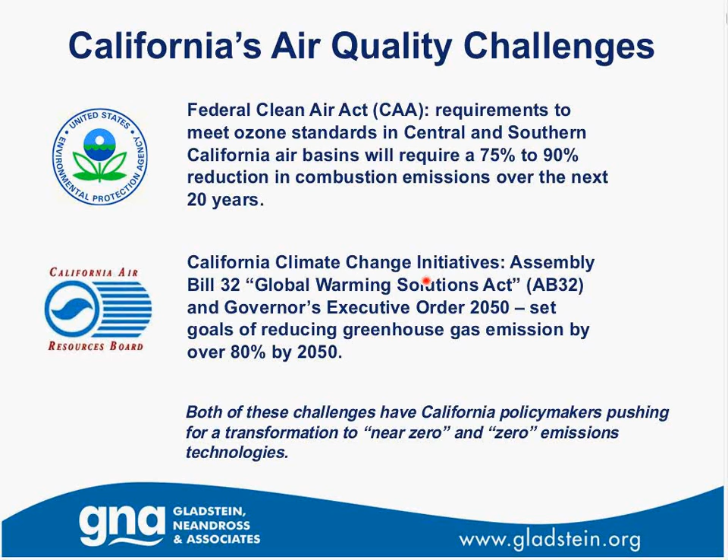Improving air quality and reducing climate-altering emissions are parallel policies being pursued by the state of California. One would think that the pursuit of one objective would help in the pursuit of the other, and that air quality regulators are trying to coordinate the two. This is in fact happening, the coordination is happening, but unfortunately, current air quality and climate protection plans miss crucial deadlines.

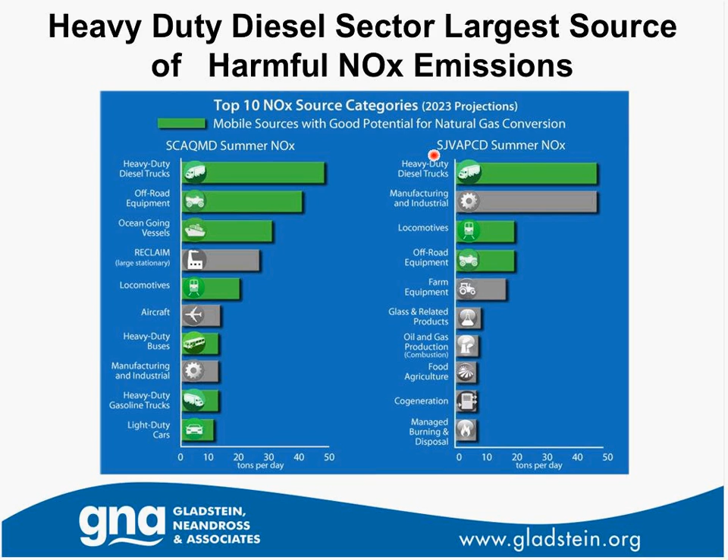Now the good news: these sources of emissions can be part of the solution. Many sources have high potential for emission reductions if they were converted to natural gas. What would converting heavy-duty engines to natural gas achieve in terms of additional emission reductions?

Everybody on this call is aware of the dramatic changes that have taken place in the energy sector over the last few years. The cost of natural gas has led to virtually every single manufacturer of heavy-duty engines to shift their focus from diesel to natural gas. Why is this the case? Because their customers are demanding natural gas alternatives to the dirty, more expensive diesel fuel that they're currently compelled to use. It's all about economics.

It's exciting for many, many reasons, but the one I'm going to focus on this afternoon, and which was the subject of a report that we recently produced, is that natural gas engines are on a developmental trajectory to be 90% cleaner than the current standard for heavy-duty engines by the end of this decade.

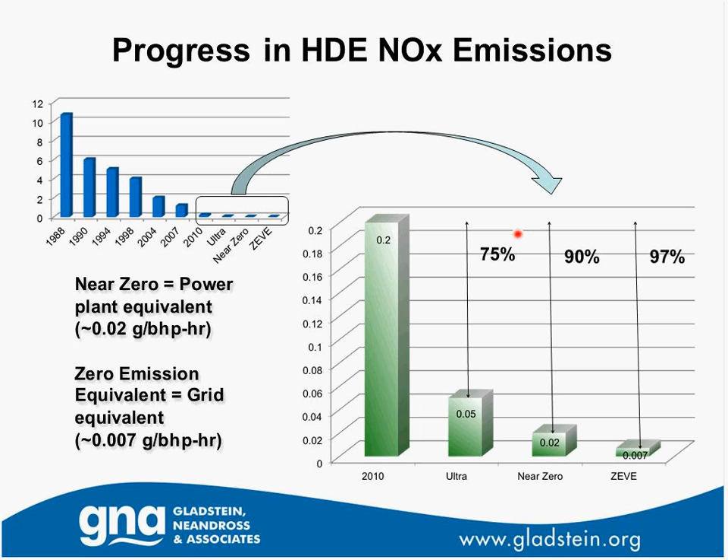This is possible. Research sponsored by Southern California Gas Company documents all of the technologies, many of which were off the shelf, that are now being applied to heavy-duty natural gas engines to enable them to meet these exciting new levels of ultra-low, near-zero emission technologies. Many of these technologies are represented on this slide. We all know that natural gas is inherently cleaner than diesel or gasoline as a transportation fuel.

To get as clean as natural gas, particularly in diesel engines, all kinds of emission control technologies have had to be developed over the last 20 years. But what happens when makers begin to apply these technologies to our inherently cleaner natural gas engines, as well as

begin to design engines from the engine block up to take advantage of the combustion characteristics of natural gas. The technologies being developed are essentially grouped into 5 major categories, or pathways, if you will, to achieve the emission reductions needed to meet these important health-based air quality standards. We group them in these 5 areas.

There's advanced engines, advanced after-treatment, increased hybridization of these engines, better vehicle integration primarily focused on efficiency improvement, and enhanced use of different gases like renewable gas, biogas, biomethane, and increasing the proportion of hydrogen in natural gas supply, which is something we've actually been talking about for about 20 years as a method to stimulate the hydrogen highway.

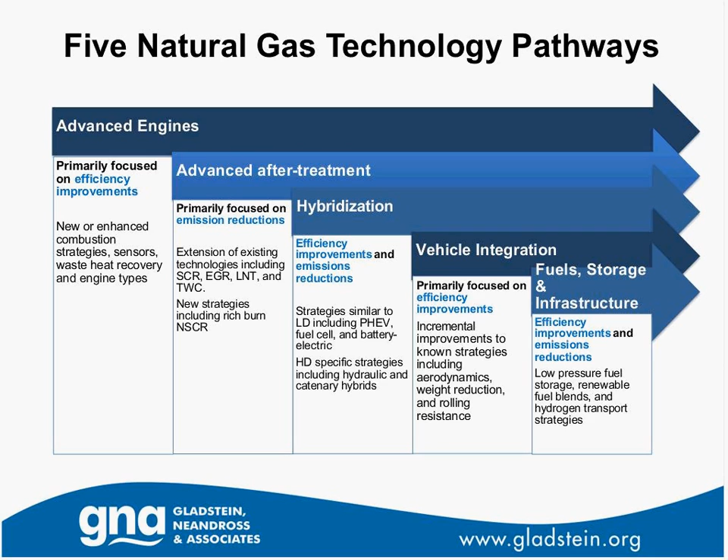All of the different technologies currently being worked on are going to yield these near-zero emission heavy-duty natural gas engines. Each will help achieve the dramatic reductions that are so desperately needed. Research has found that these technologies are already being applied to natural gas engines with dramatic results, some of which you're going to hear about in the presentations that follow.

What engine manufacturers have told us is that they now need to commercialize these new technologies. There has to be demand for these new technologies. California has been a leader in innovating air quality and climate protection policies, and it can continue to do so through the promulgation and implementation of policies to encourage the rapid development and proliferation of these near-zero emission heavy-duty natural gas technologies that we so desperately need.

Supportive public policy would dramatically help to accelerate the development and deployment timelines suggested here, which will be talked about by my colleagues a little bit later on.

Some policies include direct funding for research, development, and demonstration of what we like to call pathway technologies, to push emission reductions faster and further. The development of policies and incentives to encourage early demonstration projects. The promulgation, very important, of performance-based standards.

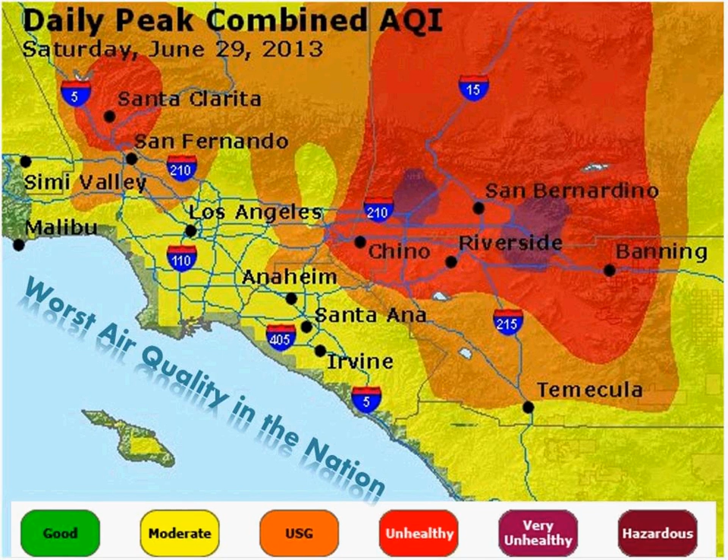In order to come into compliance with federal standards for healthful air quality, we've got to reduce those down to the dashed lines, 2023 and 2032. It turns out to be about a 70 to 90% reduction for all these different categories if we have any hope of meeting those federal standards and achieving clean air.

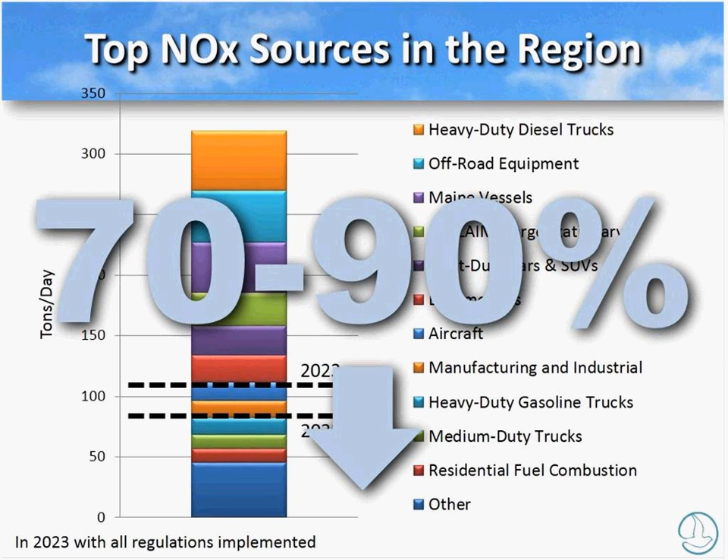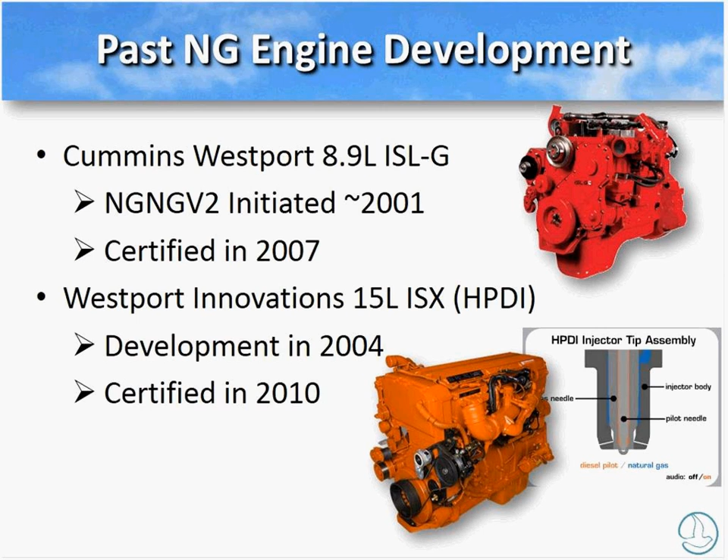The first one, the 8.9 liter, was certified in 2007, followed by the 15-liter Westport Innovation engine in 2010. Due to the commercialization of those technologies, we've had some pretty significant success stories in terms of converting fleets over to the cleaner technology.

LA Metro, the third largest transit district in the nation, converted all of their buses to natural gas back in 2011. We had a large population of school buses converted to natural gas, as well as haulers. 34% of the fleet here in the South Coast uses natural gas for these different hauler applications.

We're currently also supporting the development of engines of different sizes. We have support for the Cummins Westport 12-liter engine, which was certified at 0.15 grams per horsepower NOx, launched just last year. We're also supporting the Doosan engine that Mark will talk about, and Stephen will probably talk about the 12-liter engine.

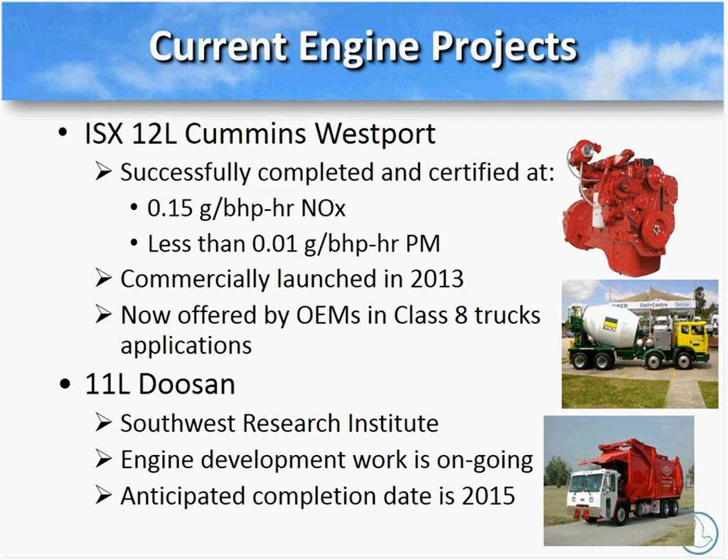The point is that we're looking at different vocations. We did the 8.9-liter and 15-liter engines, and now we're looking at the 11 and 12 liters. The reason we're looking at these different vocations is because as we examine different emissions profiles for duty cycles, we're seeing that different fuels and technologies actually have benefits depending on their use.

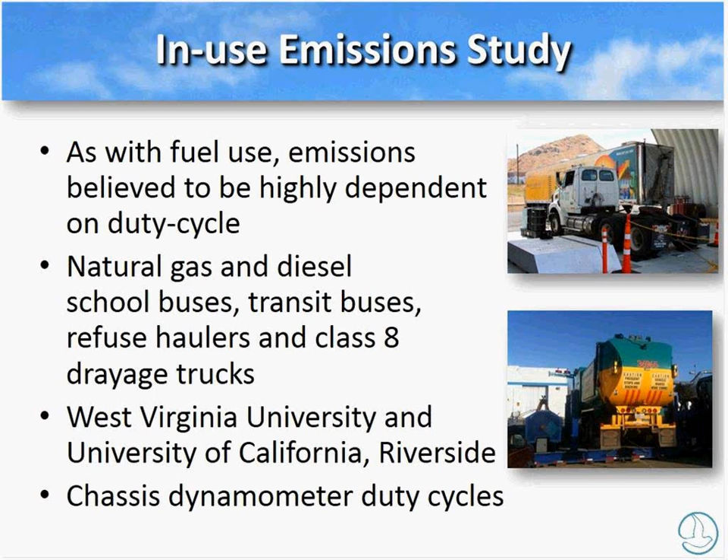For example, we did an emission study looking at different fuels—natural gas and diesel—in different applications: school buses, transit, haulers, and drayage cycles. I want to highlight a couple of those duty cycles and the results we had: a refuse application and a drayage application. The blue bar is NOx in grams per mile for natural gas technologies, and the red is diesel technologies in those same vocations. These are run on a chassis dynamometer with these specific duty cycles.

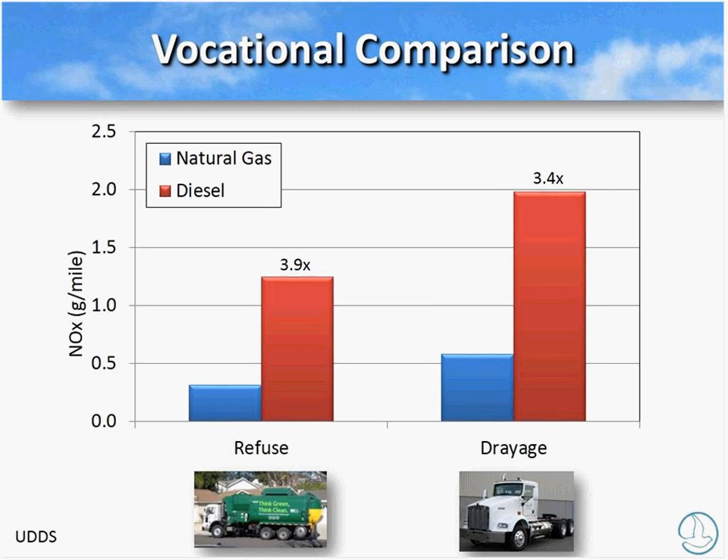We found that natural gas had about 3 to 4 times lower NOx emissions rate. For the drayage application, there are different duty ranges—near dock, local, and regional, which would be the longer haul. Again, we're seeing significant emissions reductions with the natural gas offering, due to the SCR not coming up to temperature on the near dock and local low cycles. So there's still potential for choosing the right technology for the right application, and in this case, natural gas seems to be a good fit for these different vocations.

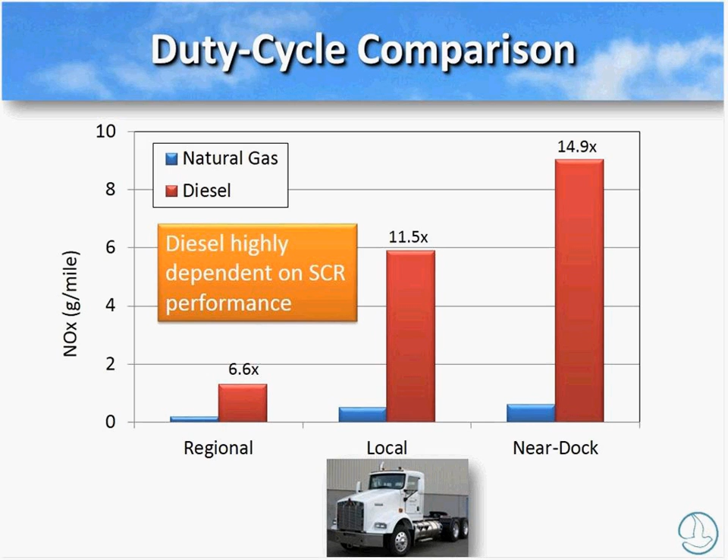As we look to the future, Cliff mentioned there's just a huge movement due to market drivers and the economics of natural gas, with fleets converting over because of the financial gain.

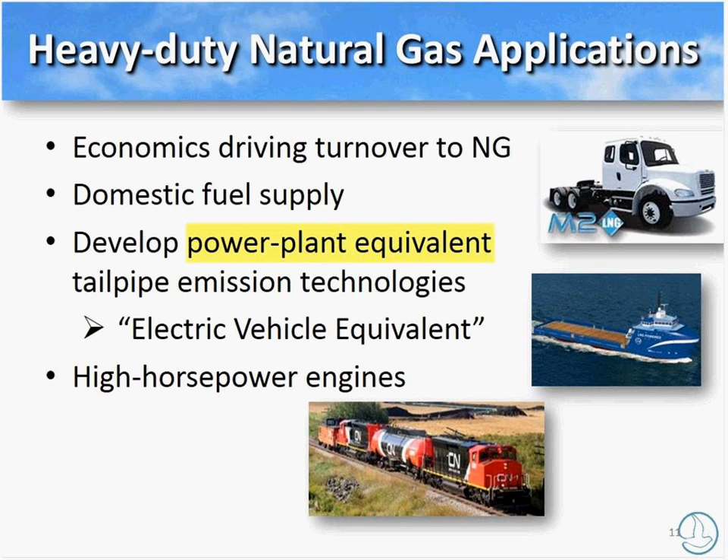So what we'd like to do is get a twofer, so you're getting emissions benefits as well as a market driver. But how do we get the emissions to be power plant equivalent, or as Cliff mentioned, equivalent to an electric vehicle? Based on relations that we've done, in order to get from a 0.2 gram standard, the 2010 standard, down to where we need to be near zero or power plant equivalent, you've got to reduce it by an order of magnitude.

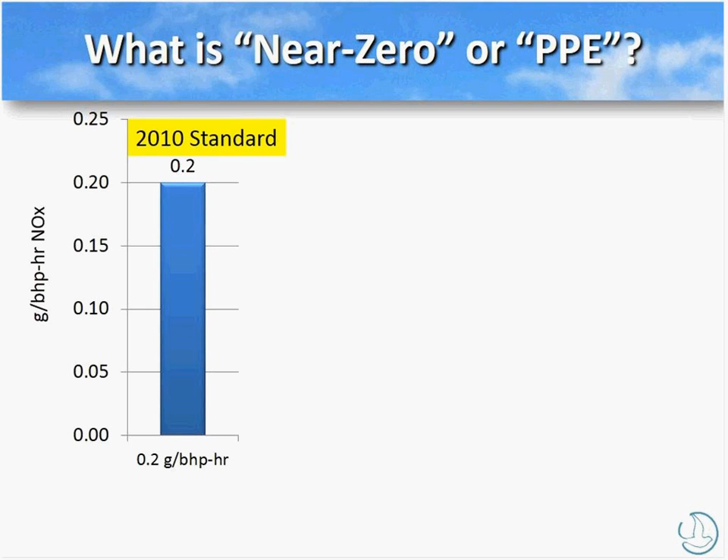I'm just throwing up some numbers here to show the mix of different emissions rates that we looked at. If you look at the EV combined cycle, this is an emissions rate for a very clean combined cycle natural gas power plant, it would give an equivalent tailpipe emissions of 0.03 grams per brake horsepower NOx. If you look at simple cycles such as a peaker unit, it gives about a 0.04 gram NOx emissions.

But if we look at our grid in the basin, so the energy consumption versus the NOx emissions for our region as a total, it's about 0.01. So that's what our grid would likely provide in terms of an electric vehicle equivalent. That's why we're saying this 0.02 is about the right order of magnitude to capture these different variations on how you would point to an equivalent or near zero power plant equivalent emissions rate. So that 0.02 number is what we're using going forward to get engines down to that level.

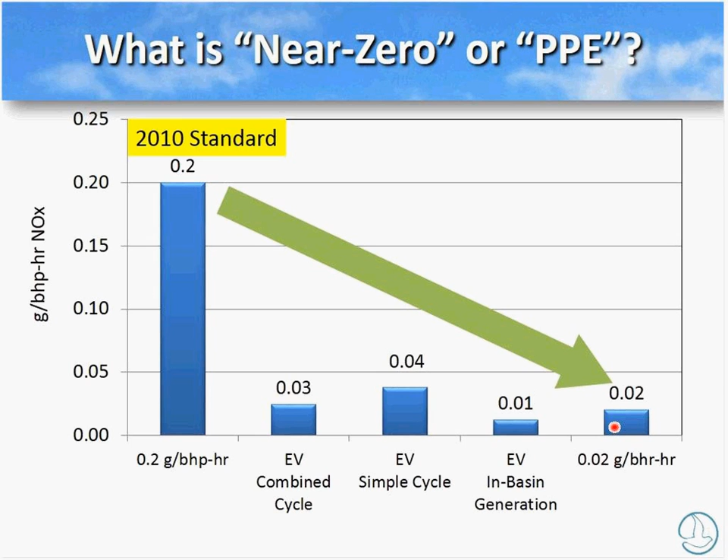Done at the South Coast in partnership with the Energy Commission, Southern California Gas, and also the National Renewable Energy Laboratory, we're looking at the next generation of natural gas engines targeting that 0.02 gram brake horsepower NOx level. We recently awarded about $3.5 million to each of these entities: Cummins to develop a 15-liter offering, and Cummins Westport to work on their 8.9-liter offering. That award was made at the end of 2013. So we're hopeful that those engines will become commercial.

We need those emissions benefits, but also to test those in those duty cycles, in particular goods movement, where we'd like to see those applied.

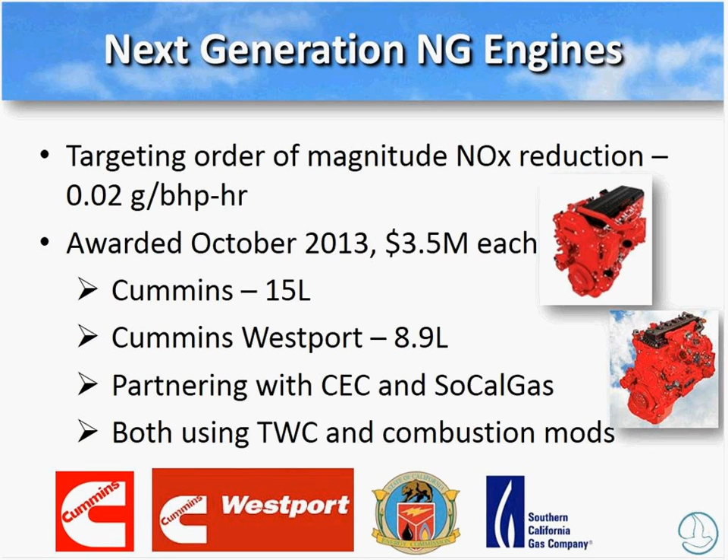So I'll end and conclude with these major takeaways. We here at the South Coast need some emission solutions now in order to provide healthful air quality to the over 17 million residents in the region. We're seeing that heavy-duty natural gas engines and fleets are being converted over to that just because of the market dynamics. We'd like to see that we get emissions benefits as well. We do see some in-use duty cycle specific advantages in using natural gas.

But if we're going to look at full support for natural gas as we look to the future and how the fleet will be exposed to these different technologies, we really need to address the life cycle issues associated with natural gas, in particular the leakage discussion that's been ongoing, and we really need to get an understanding of that, because that's going to affect how we look at not only tailpipe but longer-term GHG benefits. So with that, I conclude, Cliff, and we'll pass it to Mark.

Sorry, had mutes on.

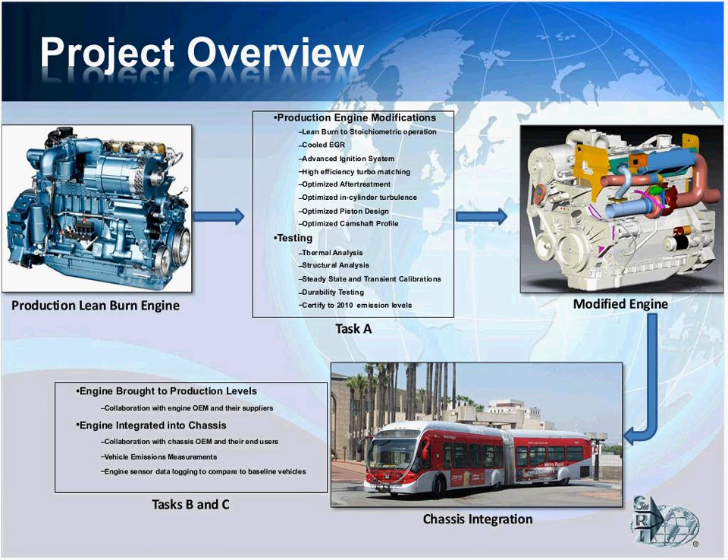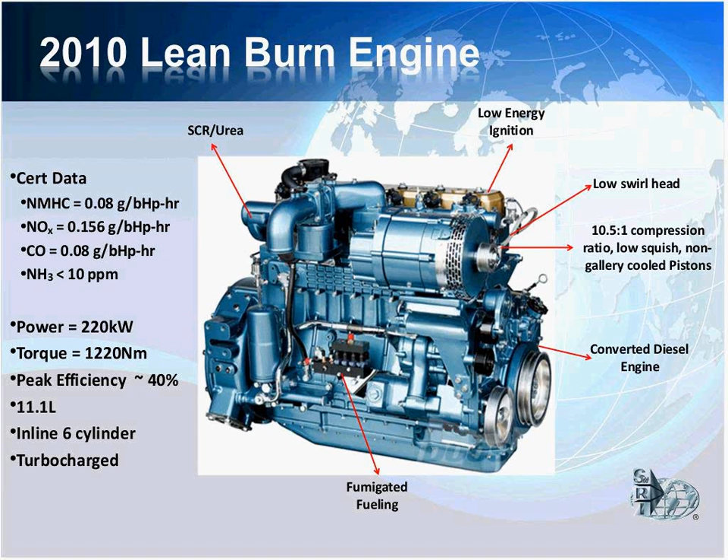This is the starting point here. This is a 2010 Doosan 11.1 liter 6-cylinder engine, 220 kilowatts, 1,220 newton meters of torque. I mentioned earlier that it was a lean burn SCR urea system, low energy ignition, low swirl heads, 10.5:1 compression ratio, and certified to a 0.15 NOx and less than 10 ppm ammonia engine.

So from that starting point, we converted the engine by changing quite a few different pieces on the engine. We looked at the pistons. We upped the compression ratio to 12:1, increased the squish on the piston to help charge motion in the cylinder to help burn the EGR now going in the engine, and added cooling to those pistons since our heat loading is now much higher. We kept the low swirl heads from the lean engine, and of course added the appropriate EGR cooler and valving to allow the EGR to come back into the intake system, and the appropriate sensors to monitor the EGR coming in.

Also upped the ignition energy to help ignite the stressed mixture from the EGR coming in, and added knock and misfire detection to help us keep the engine at its most efficient point. This engine is now uprated from 220 kilowatts to 250 kilowatts, but also has a large increase in torque by about another 400 newton meters. Now, the estimated cert levels for this engine, we have not done the certification testing yet, but it is expected, and our preliminary testing has shown about a 0.05 NOx and less than 10 ppm ammonia.

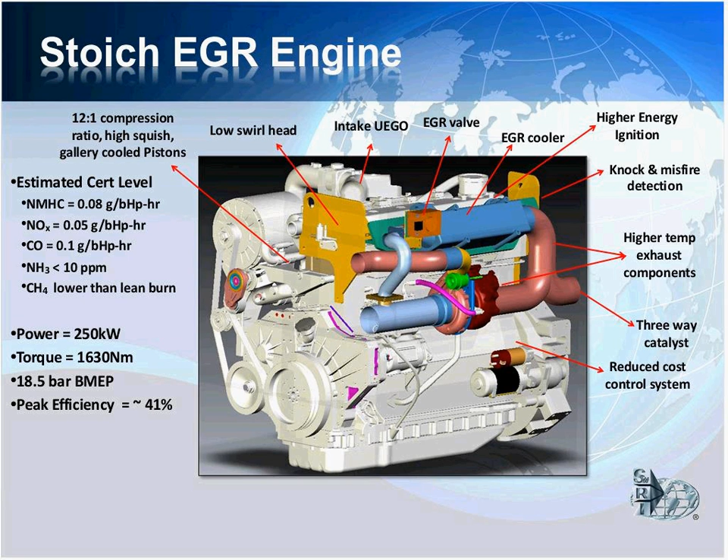Currently, the 1 calibration engine, we're about 95% done with all the calibrations, working on some of the safeties and engine protections that go with a production engine, and looking at a NOx and ammonia trade-off, and I'll talk a little bit more about that later. In addition, we have 4 durability engines running different tests to make sure we're going to make a full engine, and then finally we'll end up with 2 certification engines.

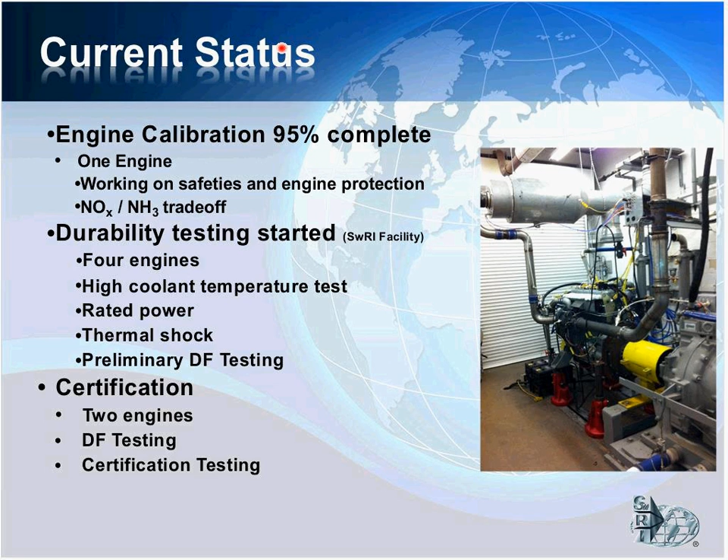Now, the bus that I mentioned that this engine is going to go in is currently running the Cummins Westport ISL G 8.9 liter, and this slide is just a quick comparison of what the Doosan engine will be replacing for this demonstration program. The torque is about 300 newton meters higher than the 8.9 liter. It runs about 2% more efficient than the Cummins 8.9, and does this while making much lower NOx and CO.

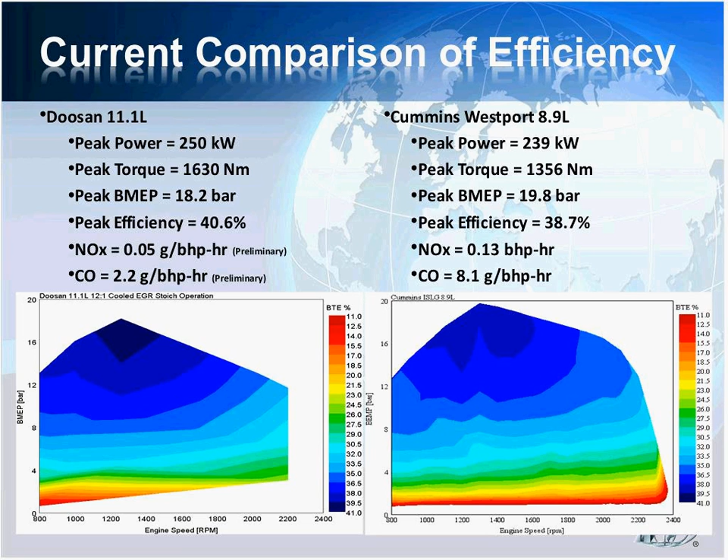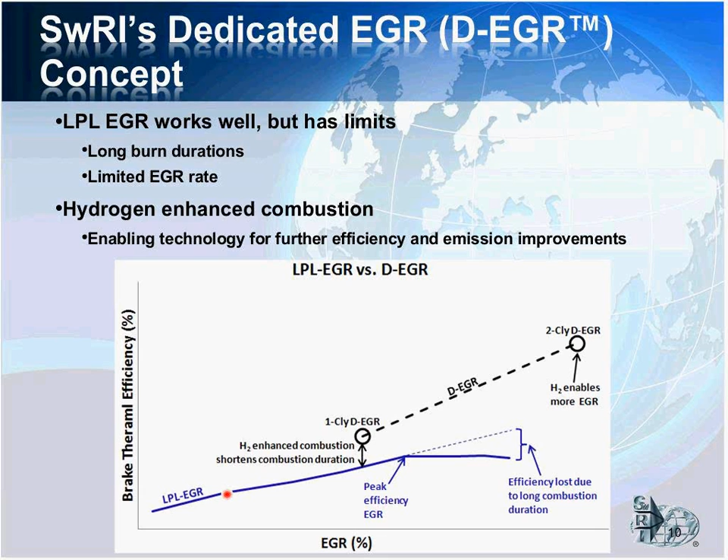So what are the pros and cons of running hydrogen in your engine? I mentioned it allows us to push a little more EGR and increase the efficiency. We can also get away with a lower energy ignition system or a less expensive ignition system. The flame speed in cylinder is increased by running hydrogen, which will help us improve the combustion efficiency and yield overall improved thermal efficiency of the engine.

Downsides are that it can decrease the effective methane number of the natural gas. It can also negatively impact the volumetric efficiency and turbocharger efficiency if you have to ingest all this hydrogen coming in. Historically, hydrogen has been energy intensive, and sometimes that can outweigh the benefits of actually running hydrogen on the engine.

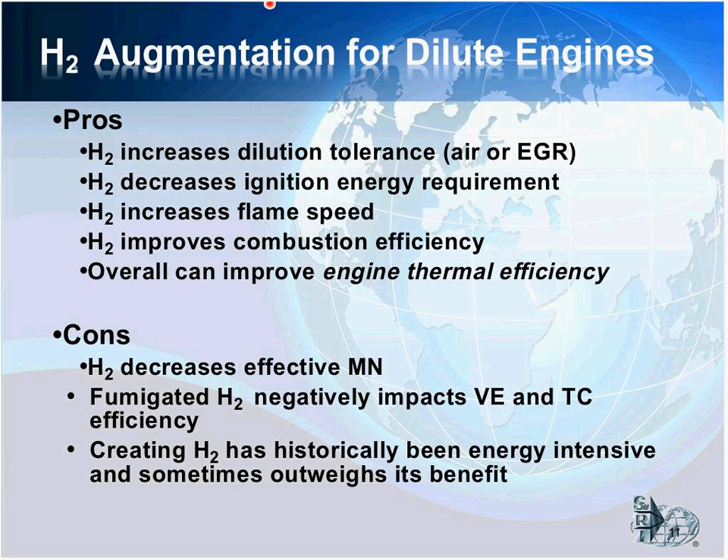When we do this, we make hydrogen-rich and CO-rich exhaust that comes back around the engine and feeds all 6 cylinders. So now we have the hydrogen-enhanced combustion, and we're able to run the other 4 cylinders in such a way that we still have a stoichiometric exhaust, and we can utilize a 3-way catalyst. So no external energy-intensive hydrogen generating equipment. It's all done in cylinder, very low cost.

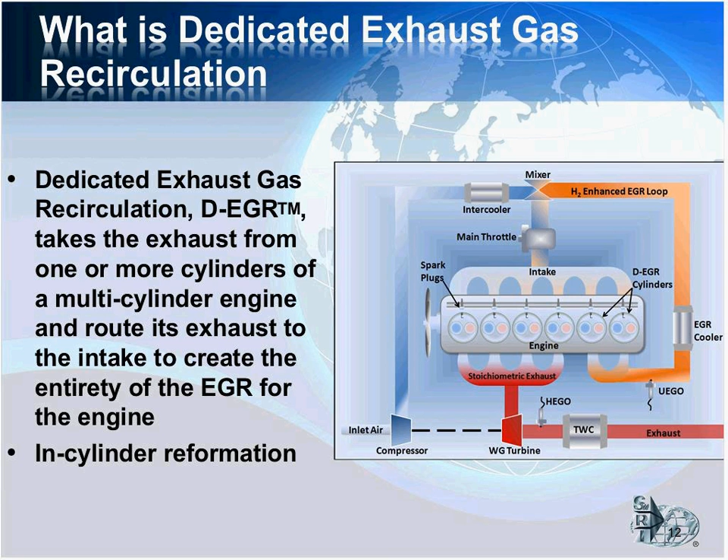So some of the benefits of hydrogen-enhanced combustion: I mentioned all the hydrogen is produced in cylinder. It allows us to accelerate the combustion and lower the ignition requirement, and the combustion efficiency and stability are greatly improved by adding just a little bit of hydrogen that's produced in these cylinders. It's low complexity. Everything is generated from the 2 cylinders, and whatever you take in those 2 cylinders is what you get. And none of the EGR has to pass through the turbo machinery, so if there's any concerns about additional wear or corrosion in the turbo machinery, this is now bypassed.

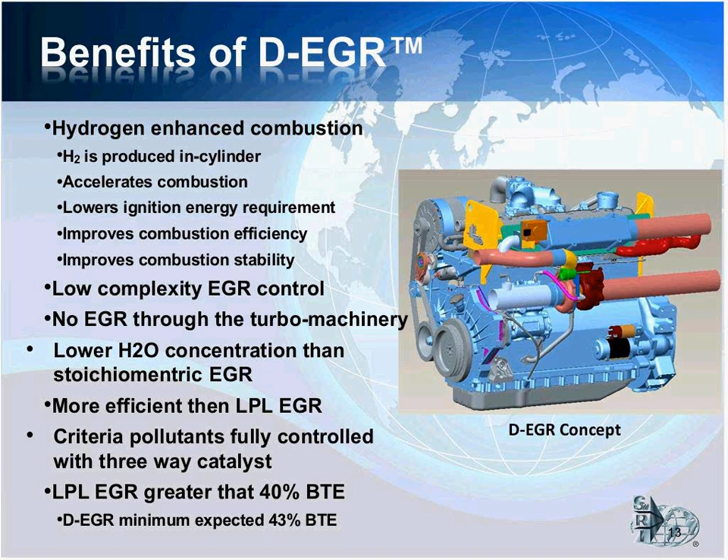It also is more efficient than the already efficient low-pressure loop EGR, as I mentioned in the NREL program, and all the pollutants are fully controlled by the 3-way catalyst. What we're expecting as far as efficiency on the dedicated natural gas engine is a minimum of 43%, which is up to maybe 4% better than the low-pressure loop EGR.

So to be able to combat this, we're going to focus on the cold start on another program that we have going on here. And we're going to look at things such as the close-coupled catalyst or electrically heated catalyst, turbocharger bypassing, insulated exhaust, or lean-rich operation in which you run certain cylinders rich and certain cylinders lean during cold start to try to produce hydrogen and enable the catalyst to light off in a faster manner.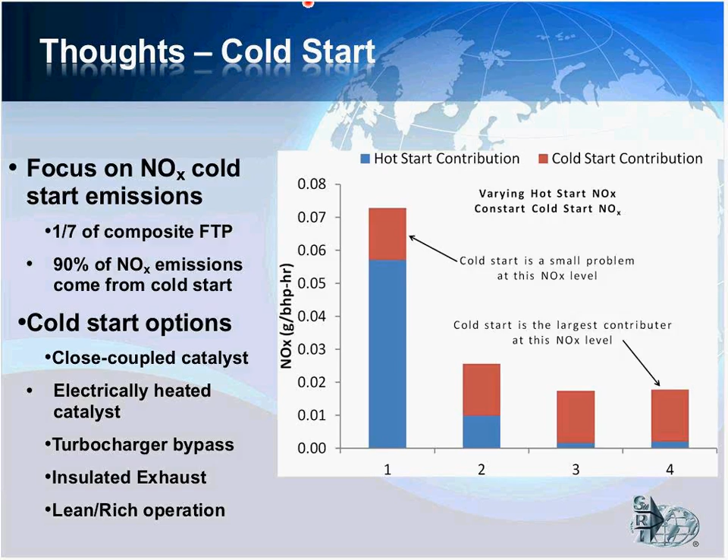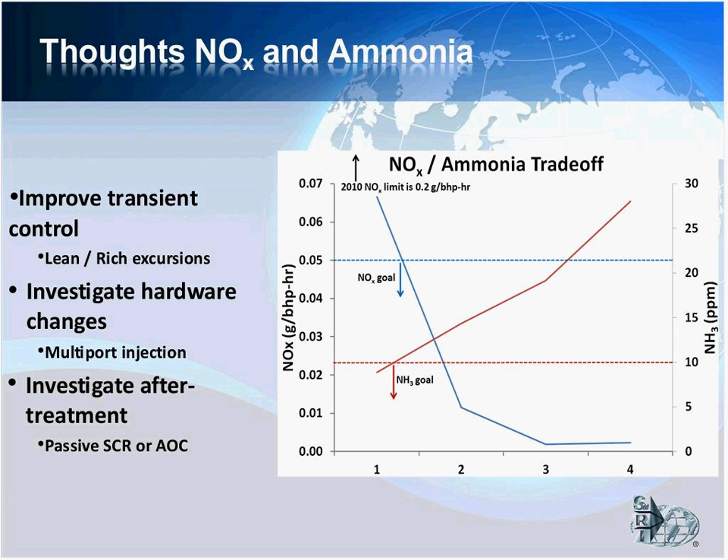And with the dedicated EGR concept, we could see significant improvements with natural gas. The dedicated cylinders will generate a lot of hydrogen with natural gas due to the favorable hydrogen to carbon ratio. And with this, it should allow us to reduce the cold start emissions and catalyst light-off times. Also, the greenhouse gas emissions should be quite a bit lower. Currently the low-pressure EGR engine shows about a 15% reduction at current efficiencies. As we move to more efficient systems, such as the dedicated EGR natural gas engine, we should show perhaps up to a 20% reduction in CO2 versus the diesel engine.

This dedicated EGR concept is not necessarily just a concept. We've actually successfully implemented it on the light-duty side, as shown by the 2013 Buick Regal there that we have at Southwest, in a successful program. And we hope to take the technology to a heavy 6-cylinder engine running on natural gas.

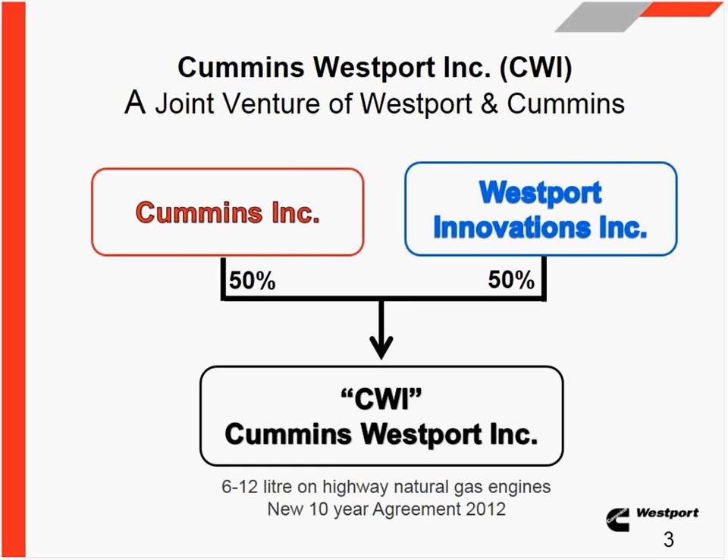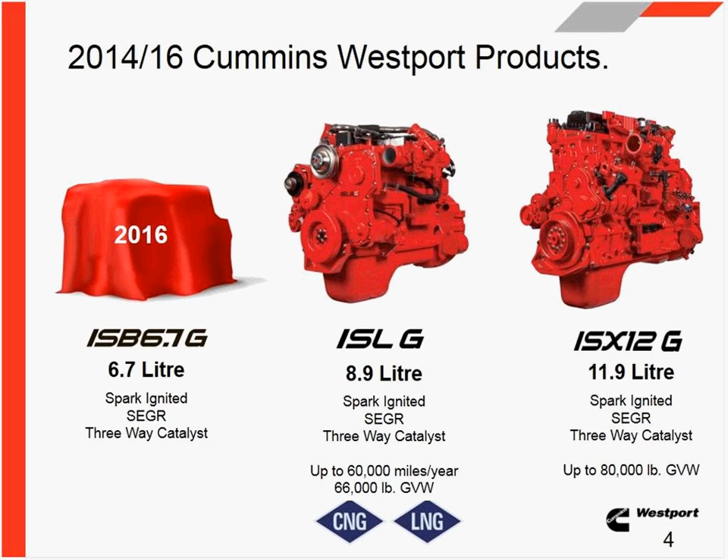A quick rundown of the CWI combustion technology, just to show, let me make sure I'm on the right slide here. Sorry, I might be one slide behind.

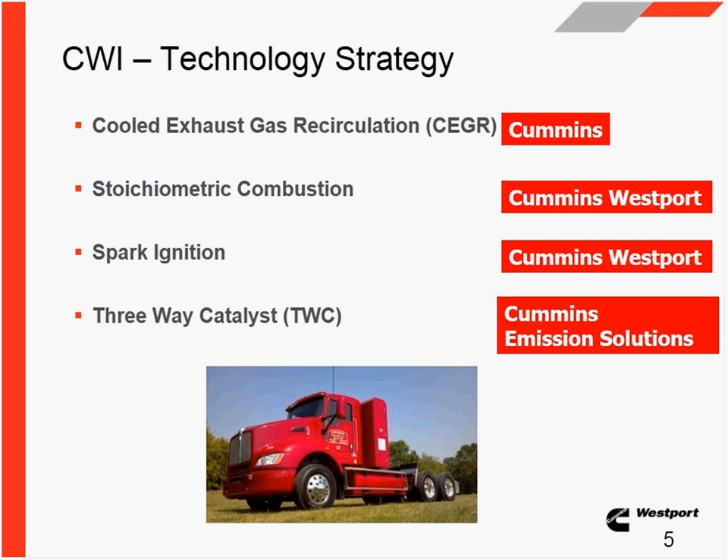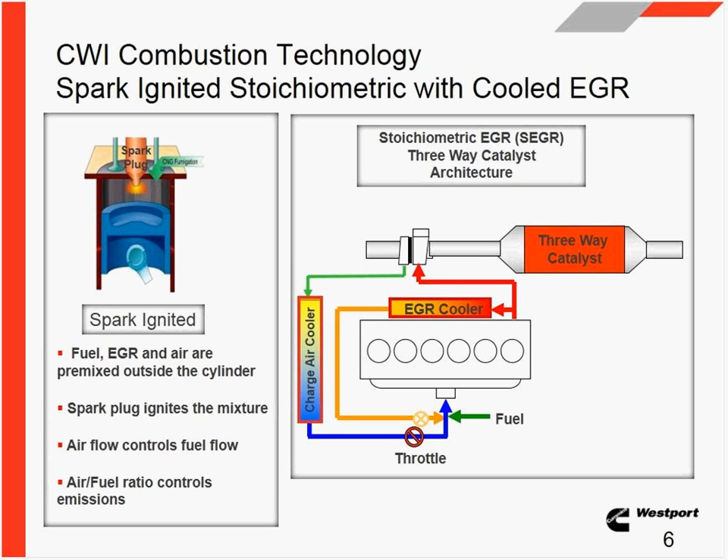This reduction required the introduction of after-treatment technology, which was selective catalytic reduction, SCR, systems in the diesel engines, and for the CWI natural gas engine, which uses stoichiometric combustion, it was able to use a three-way catalyst. The three-way catalyst can't have excess oxygen. It needs a low oxygen environment, and that's why stoichiometric combustion is needed, whereas diesel engines are lean burn, with excess oxygen, and their only alternative for after treatment is the selective catalytic reduction SCR system.

Combustion improvements were also utilized with the CWI products to achieve 2010 emissions levels, moving away from lean burn to stoichiometric combustion. So on the graph there, we can show which technologies were used to achieve the various emissions requirements, moving from lean burn to our current stoichiometric spark-ignited product.

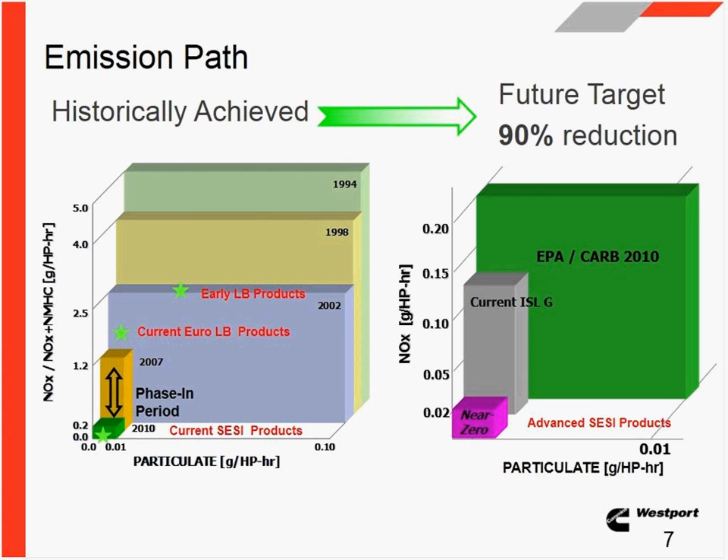Now, with current NOx levels already low, we don't have the luxury of introducing a single technology that lowers NOx in all operating conditions. We need to target operating areas where the highest NOx levels are formed.

Two of the areas are immediately after coasting or motoring, which is estimated to produce about 6% of the NOx emissions in an FTP test, federal test procedure test. The second operating area is upon initial operation, which is estimated to represent about 30% of composite NOx emissions in a cold FTP cycle.

During coasting and motoring events, the fuel is typically shut off while the air continues to pass through the engine and through the catalyst. That air passing through the catalyst oxidizes and cools it, resulting in poor NOx conversion efficiency. Then the fuel is turned back on, but the catalyst isn't operating at the right temperature. That poor efficiency allows the production of higher NOx levels right after that motoring event.

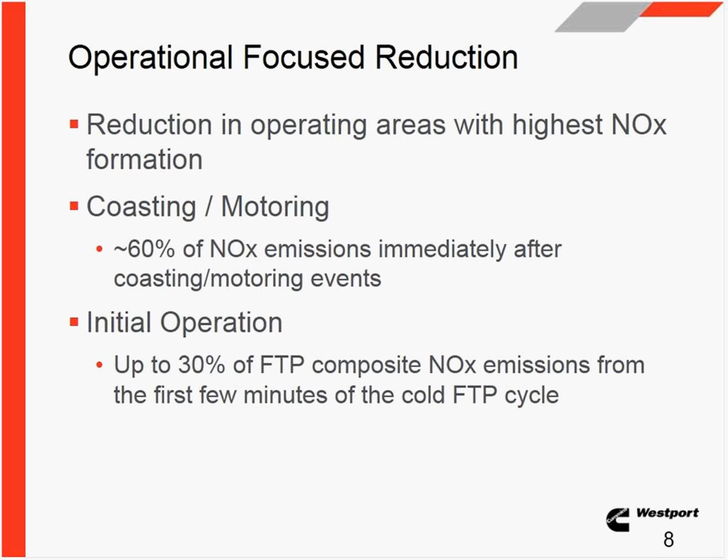With these operating areas in mind, there are a number of levers we can pull to lower NOx emissions. What we're focusing on, and one of the main ones that's quite obvious, is improvements to the catalyst aftertreatment with wash coat formulations to improve low temperature operating efficiency. Besides the wash coat, the overall size of the catalyst can be addressed to convert more NOx at all conditions.

As mentioned, during coasting and motoring, when the fuel is shut off, the catalyst is cooled by the continued flow of air. To help reduce this cooling, it is possible to reroute that air and keep the catalyst closer to optimal operating temperatures.

Another lever that can be used to reduce NOx is improved air-fuel sensing. Both more accurate lambda sensing and sensing over a wider band can be used for air-fuel control. There are limitations with the current oxygen sensor in situations where it's desirable to run slightly rich of stoichiometric to reduce the catalyst quickly for improved NOx conversion efficiency. The sensor isn't able to accurately control the air-fuel ratio outside of a narrow band near stoichiometric. It's really good at saying if you are stoichiometric or not, but not too good at setting exact levels once you're outside that narrow band.

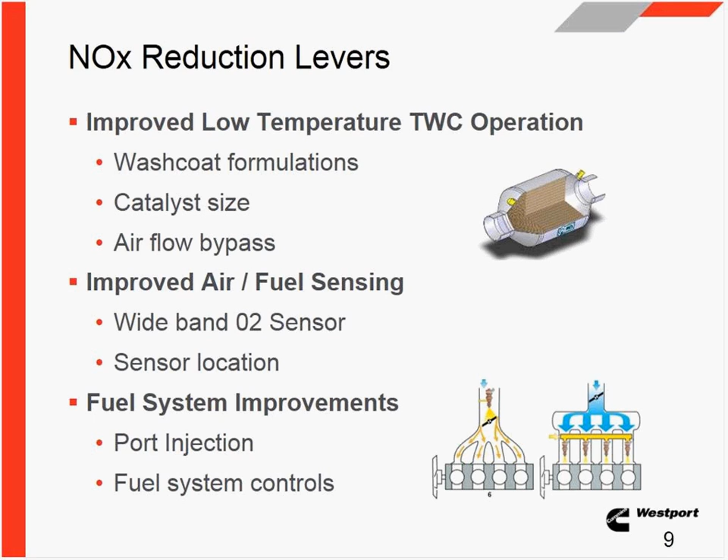Now, as expected, reduction of NOx doesn't come easily, and it doesn't come for free. There are trade-offs that have to be considered and addressed in order to continue to produce a reliable and durable engine with the performance expected by the market.

Typically, as NOx emissions are lowered, fuel consumption is increased due to the need to run richer to maintain the high efficiency of the catalyst and keep it hot. Focusing on NOx reduction, the drop in fuel economy is likely to range 3 to 5% for normal operation and could hit as high as 10% over the entire FTP cycle. So if you did nothing else than address NOx and didn't look at any other part of the system, you'd come with a pretty substantial fuel economy penalty.

The market won't tolerate a drop in fuel economy going forward. They'll expect natural gas engines to show continuous improvement, much like we've seen with diesel engines improving their fuel economy since 2010, since introducing SCR systems. The other side of this is the greenhouse gas rules, which came into play last year for early entry, this year, and then looking at 2016 and 2017 with further reductions.

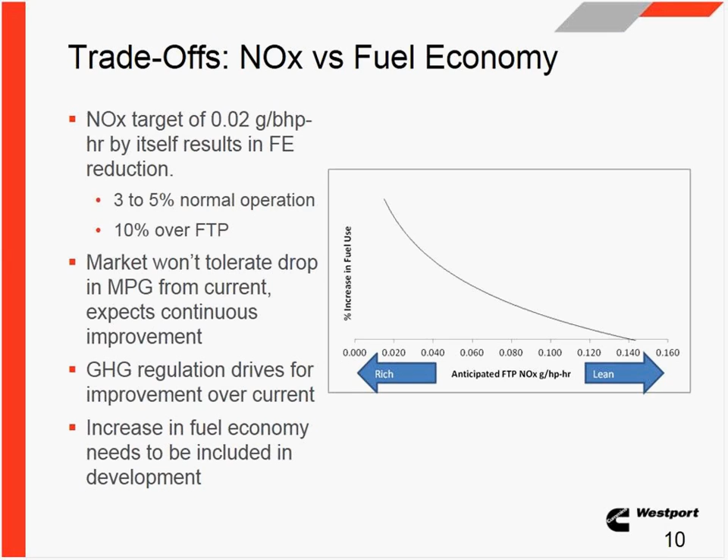Another trade-off we see is between NOx and ammonia. Stoichiometric engines operating three-way catalyst control typically exhibit a steep trade-off between reducing NOx and increasing ammonia. Ammonia is not present in the exhaust stream of stoichiometric combustion upstream of the three-way catalyst, and is generally created by the three-way catalyst under fuel-rich conditions. So while NOx is primarily converted to nitrogen, water, and carbon dioxide, hydrogen is produced from the available water. This hydrogen may then be converted to ammonia, especially under fuel-rich conditions, which are necessary to aggressively reduce NOx.

The formation of ammonia is addressed through improved air-fuel controls and carefully managing fuel-rich operation. Much of the levers we've talked about previously will also help keep ammonia levels down, and certainly 10 parts per million is one of the targets we're aiming to keep below.

Now, there are systems that could be added to the engine, such as an additional SCR system or an ammonia catalyst. Those take up space, and they're also very expensive, so those aren't the first choice as far as approach, but to improve it through air fuel control.

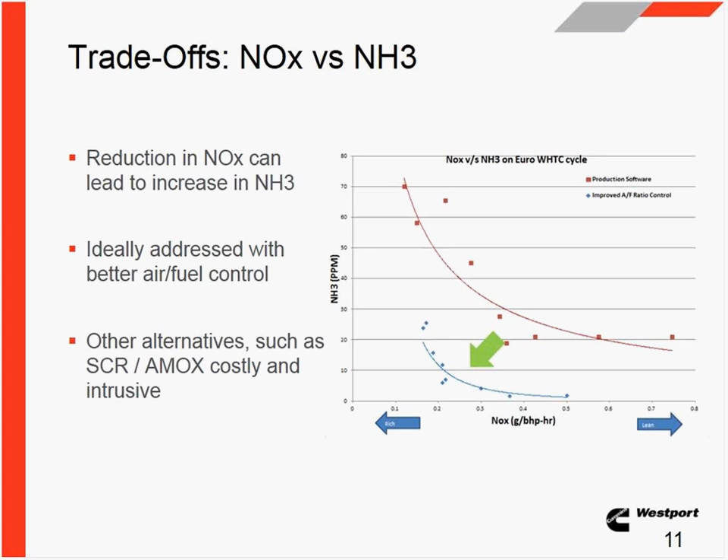Now, there are a number of additional challenges which need to be considered during the development of technology and products to lower NOx. Many of the levers used to improve fuel efficiency, such as increasing engine compression ratio, will stress the engine more and can negatively impact engine durability. These can be addressed through design, such as material changes and control logic, but typically come with an increase in cost, and that cost then ends up being passed on to the end user, to the fleets, with increased product costs, unfortunately.

When the engines are certified for emissions, they're relatively new with new components. So it's one thing to pass an emissions test with new parts right off the bat. It's a bigger challenge to ensure that that engine will continue to pass the emissions levels throughout the emissions warranty period, through the life of the engine.

So it appears that just a 90% reduction is needed to reduce NOx from its current level at 0.2 grams to 0.02 grams. You actually need a larger than 90% reduction so that you can account for the degradation loss during the life of the system, to maintain that 0.02 grams or lower throughout. So that's going to be a big challenge.

A challenge we're going to face is the onboard diagnostics, or OBD, requirements coming into play for alternative fuels in 2018. They require onboard detection when emissions fall outside of the emissions limits. So now not only must the engine and aftertreatment be improved to produce almost near zero NOx emissions, but we have to improve the onboard diagnostics to be able to detect not only that near zero level, but an even smaller level and change in that to see when something may be wrong and notify the operator. So this is another area that's going to take significant development effort.

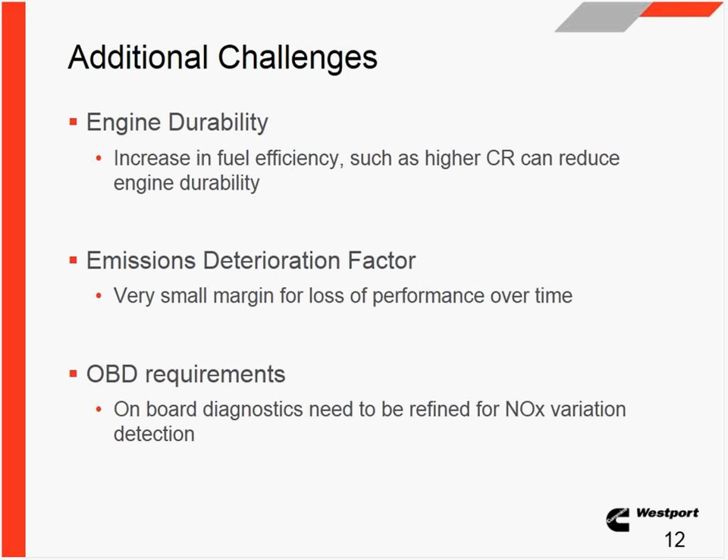Now, near zero NOx emissions has been the focus. We can't forget about the current and future more stringent greenhouse gas emission regulations. The GHG emissions is tied directly to fuel economy, and therefore is subject to the same NOx versus fuel economy trade-offs that we discussed earlier.

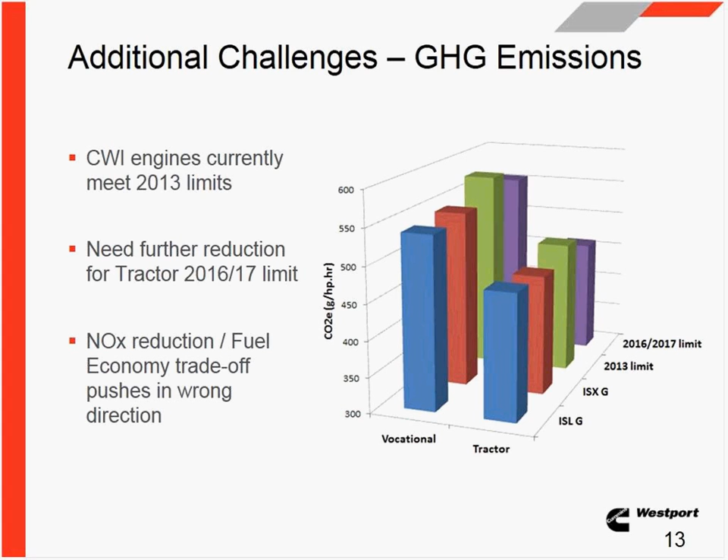Our engines currently meet the 2013 GHG requirements. The ISX 12G will need some improvements in the tractor segment to meet the 2016-2017 limits there. So again, as we look ahead, we need to roughly double the improvement in fuel efficiency - one to counteract the effect from reducing NOx, and secondly to further reduce fuel consumption and increase fuel economy to meet the GHG limits.

So I can conclude by saying that, even though NOx levels have already been reduced by 96% over the past 20 years, a further 90% reduction is needed to achieve near zero levels of 0.02 gram horsepower hour levels.

Near zero NOx emission levels are achievable through technology and product development. The targets are driven by the operating areas where the highest levels of NOx are formed. Levers and trade-offs to achieve the near zero NOx levels are understood. We still understand too that it's going to take significant technology and product development to meet these results and continue to produce the expected viable and durable product that the market requires.

We feel Cummins' current stoichiometric cooled EGR spark ignited products are positioned well to be the basis for these future near zero NOx products.